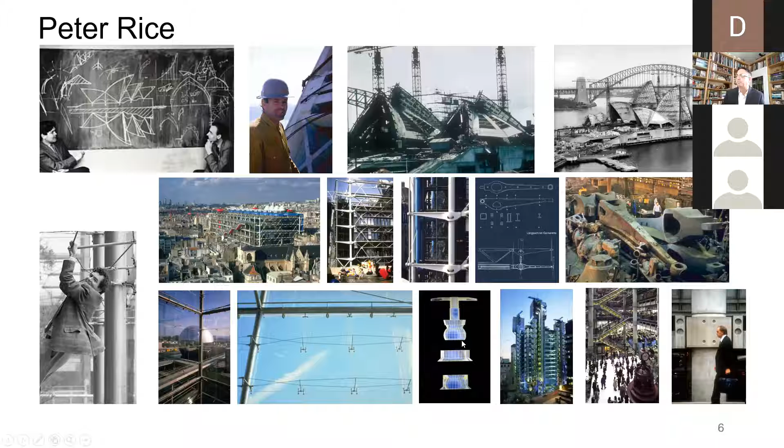These beautiful sketches are from MBM. Shame, do you know who did these sketches? Was this Oriol, or David, or was it Jose who did these sketches?

There's these beautiful stories of Peter Rice. Is that Shame? Yes. No, I would think it's Oriol's sketch. Yeah, I think it's Oriol Bohigas' sketches.

There's these beautiful stories of Peter traveling to Barcelona, working with the architects, and asking for pictures of Gothic cloister masonry construction in Seville, coming up with this idea based on ideas he had from the Palacio da Ajuda in Lisbon, where he'd seen this 17th century palace where the walls were constructed but weren't finished—the owner decided to go off to war instead of completing it, or had to. But this wall had withstood major earthquakes and was standing, so maybe we could build a building off of it.

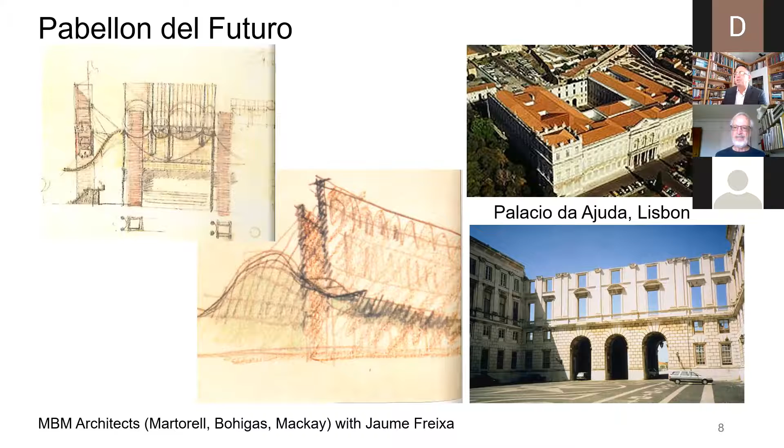Initially, the idea was to prop a roof with two stone walls. The conundrum was the project could only afford one stone wall. So I was quite fortunate as a young engineer that Peter Rice and Tristram Carfrae gave me a week to think about it and come up with ideas.

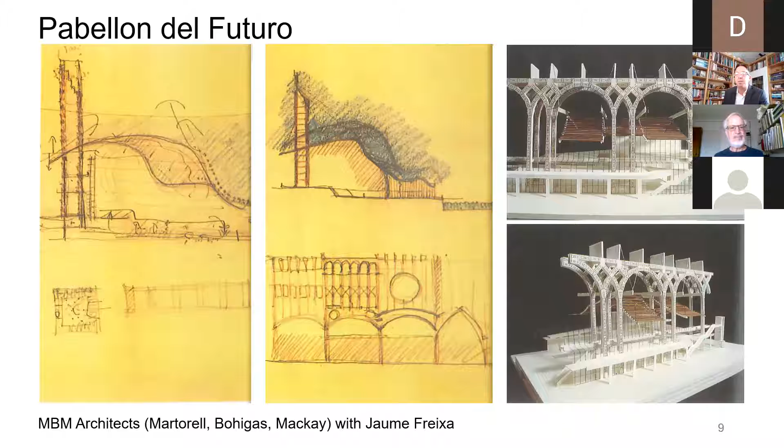The idea I came up with was to replace the second wall with a steel lattice that's braced in elevation, and in section it has these poke-through struts that tie diagonally. But you can think of the building—hey Rick, Battaglia, great to see you, Rick.

You can see in elevation that it's easy to explain. The complex three-dimensional system is such that if you push along the longitudinal elevation of the wall, you just get these diagonal ties working in tension, and if you push in and out in section, you get these diagonal ties. So it's essentially cross-braced three-dimensionally, but you can think of it two-dimensionally.

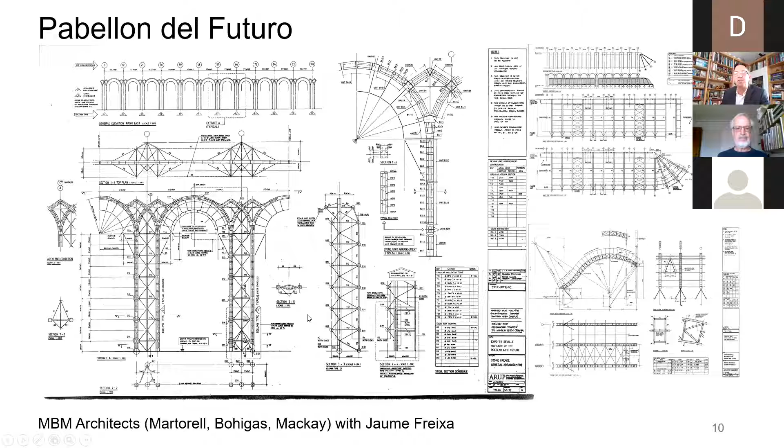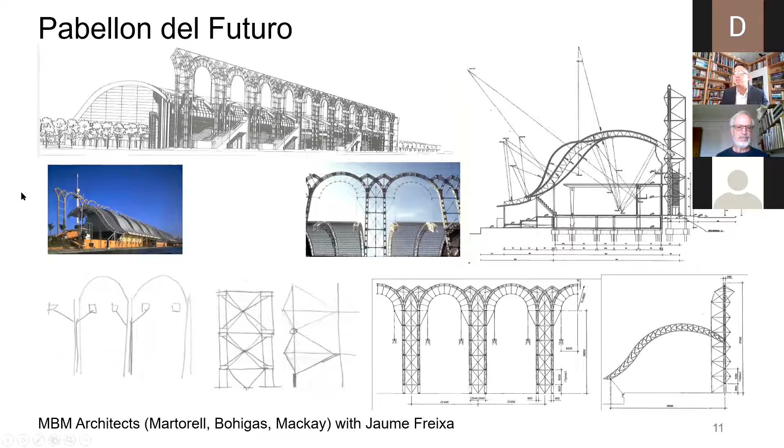Initially, the architect took our idea, and we weren't really clear what side we wanted the steel on, and they drew the section with the steel on the outside. The idea was that this wall was going to create a gateway to the city, because there's a park in the city of Seville, on the island. Just like the Feria has these beautiful gates, so we had to convince them, or ask them to please rotate it around, because we felt very strongly that the stone should be on the outside and the steel should be between the buildings. So the stone should face the park.

Here's some sketches and analysis that I did. Back then, we had to wait till everyone left the office, and we put a cardboard hood around the computer and shot a bunch of slide photos of the images on the computer at different shutter speeds and apertures, like 10 of each, and then one of them would be good. You can see the dust and stuff in the lens, but this is the basic diagram.

You pull down on a funicular pattern of ties to use steel for tension, and it compresses the stone. That's blue in the arch and red in the column. I'll try not to get too technical here. The columns are pin-ended stone elements because they're braced, so they're fully stable. They don't need to be moment connected. They can be pins between the joints, but the arches need to be continuous and transfer bending through the joints.

That's this idea of understanding stability of arches, creating analogies using lightweight geometric nonlinear structural analysis programs to allow joints to open and close. One key point I want to make is I tried to make just 5 load cases. I know it's 6, but really it's 5. I try to understand the structure with 5 load cases, and try to set that limit. In the end, you can add more load cases, but in modern day computation, you see engineers starting off and pressing buttons and ending up with 500 load cases, not really understanding the behavior and which one governed.

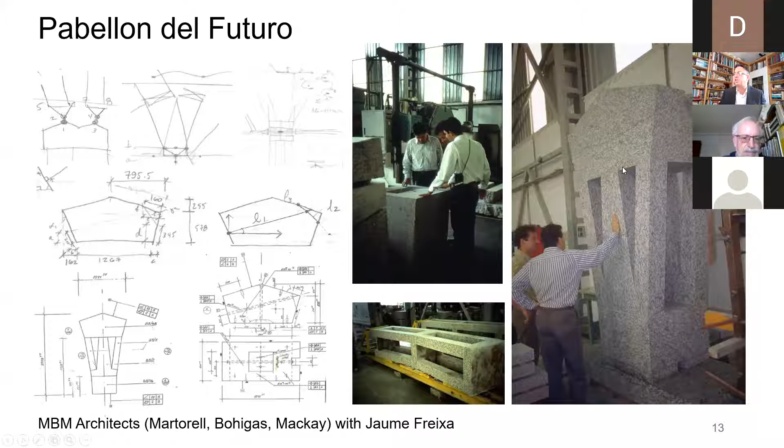Here's a picture of me and Peter and Ignacio, who was the stonemason, with some of the units in the shop. These are some of my sketches trying to figure out this springing unit. This is the area that gave us the most trouble analytically, and was quite a difficult piece to build. This is a different stone, but you get a sense of the scale of the structure. This is just the springing stone, right here. How do you analyze that? Let's see. I'm going to have to speed up a little bit.

One of the things that was really important to me was the base stone and how you encountered the building. I was studying classic architecture. People were laughing at me because I was trying to figure out how to do this base stone. They were making jokes about me, and I was trying to be an architect, trying to give it a pedestal or a capital and make it hollow so that people could relate to it. But in the end they said it needs to be solid because it's so dangerous that a truck or something could hit it, so it needs to be very robust at the base. So we'll just have a solid piece of stone. That's what we ended up using—this giant clamp, big chunk of stone, put it on its base, and off you go.

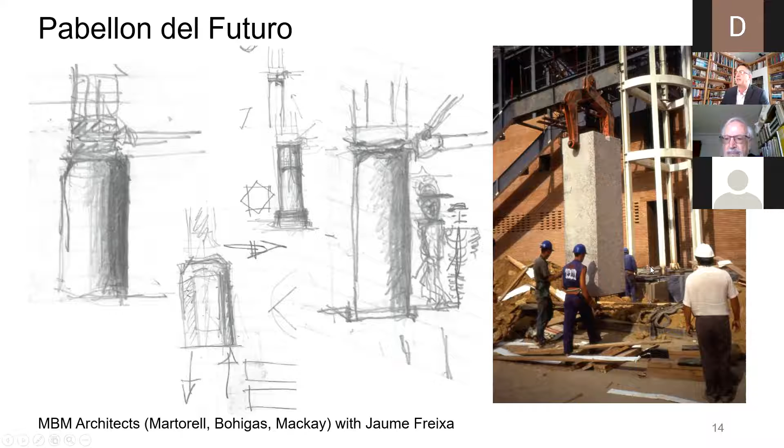Another story to tell was how we braced the arch. Initially we had this pattern, and we looked at so many different patterns of ties. Alistair Lenczner came up with this genius idea of making the last funicular radial tie a strut, called the out-of-balance strut, so that if the downward load from the roof is not in balance, the unbalanced load will make its way evenly with an even tension throughout the whole arch, loading the arch. Any unbalanced load will push on the strut and then pull and wrap itself around here instead of bending the arch. Sorry if I'm getting a little too technical there.

Hey, Pierre, good morning.

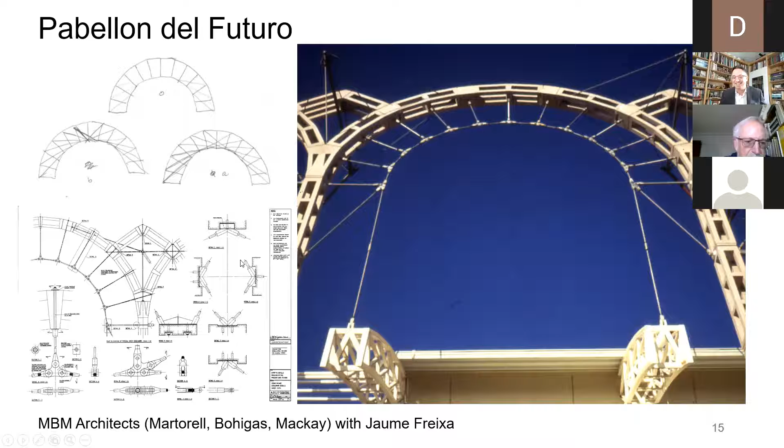Building it was the real challenge, and the builder insisted on building the capitals flat, which was the most susceptible point when you rotated it from its table and then tried to lift it, because it didn't benefit from its self-weight. Stone was likely to crack, and sure enough, we cracked the first units until we stiffened the jig and stopped clamping across joints.

I'll try to tell this quickly. Initially, the idea was they build the columns flat and tilt them up. I was so concerned about that, I offered another solution: just building stable units. And ultimately, that's what we did.

The contractor insisted on doing this big scaffolding on tracks. We told him it would be very hard to control the dimensions and would take too long. They built it anyway, and then ended up abandoning it because they couldn't get the tolerances right.

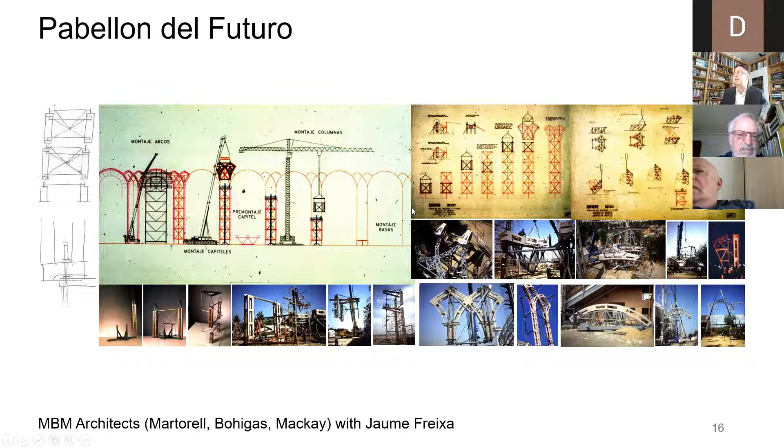So then we built these jigs. Alistair came up with another brilliant idea of a sliding joint and a temporary joint, so when you lifted it, we could control where all the displacement took place. These are some images of building it, and a couple of Peter's original sketches. The architects joked that he couldn't sketch, but these are pretty decent sketches for an engineer.

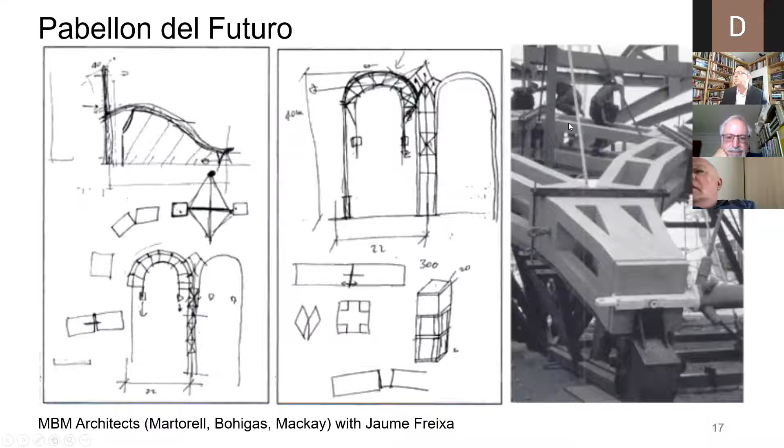Give them more credit. This is an example of building one of the capitals when it was rocking - that's me right there. I wouldn't let them tilt it further until I went through and checked every piece of stone to make sure it didn't crack. You can see we evolved to just clamp across the pieces, and try not to clamp across a joint, so when it rocks, all the displacement is controlled at the joints.

Another story here, about creativity and incubation: every other column has a stair interrupting the bracing, and to match the stiffness of the fully braced column with the portal frame that allowed the stair to pass through, we initially had castellated moment frames with lozenge, elongated circle castellations that you typically see in a castellated beam, or a beam with holes in the web.

I had this vivid dream out in the square in London, in Fitzroy Square, with the chairman at his desk in the center of the square. I went up to his desk, and he told me that the castellations should be diamonds. I got up the next morning, went into the office, and told Alistair and Peter that the castellations must be diamonds. I think they laughed at me and said, fine, draw it, diamonds it is.

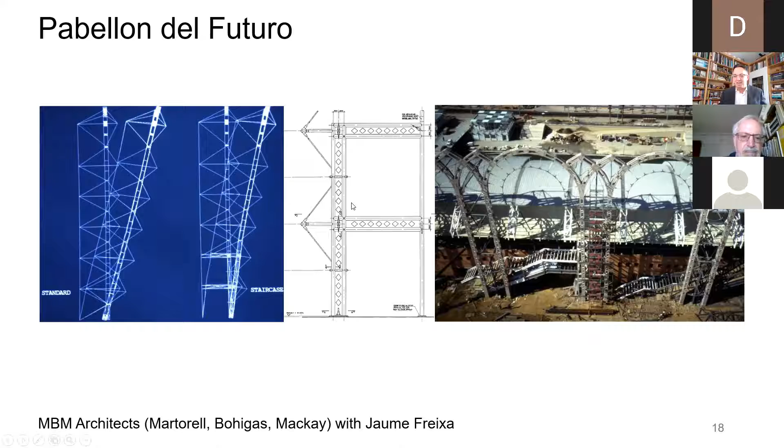The next project I want to talk about is the Sony Center in Berlin. This is a project I worked on while I was in New York with Murphy/Jahn Architects, based in Chicago, Helmut Jahn. This is really an amazing project - I just want to focus on the roof. It's 102 meters long by 86 meters wide, and it floats on top of these buildings.

The first story I want to tell here is about geometry. What we did is design one fabric strip - basically a surface of revolution with 10 degrees of fabric, 5 degrees of glass, 10 degrees of fabric form. Then we tried to figure out how to get the whole basis of the idea, which is a circle, an offset circle in an elliptical or ellipse-like plan for the plaza, and we tried to find that mathematically.

In the end, we just came up with the idea of extruding it like a cookie cutter. So we take one typical strip - the longest one was 60 meters - spin it about an axis of revolution, tilt it, and then extrude it and slice it. By trial and error, I just kept moving the slice back and forth until it kissed in the back, so you get this ring kissing - just kind of move it around until we get that kiss.

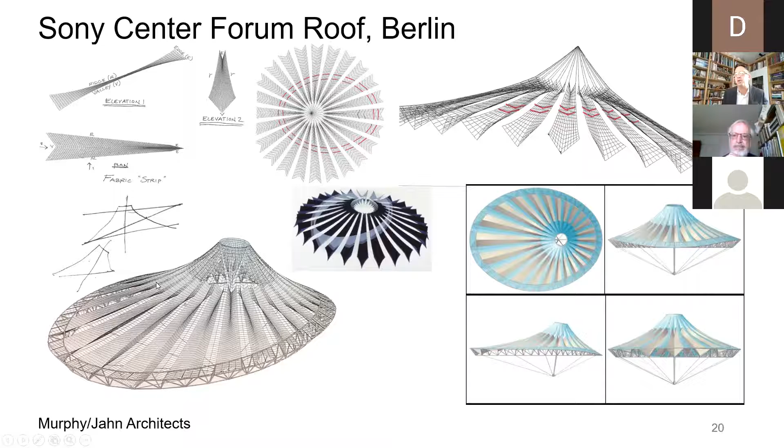So every one of these fabric pieces is the same, just cut a little bit short, and all the glass is the same as you go around. So it has this surface of revolution regularity, but through these geometric operations has a very dynamic form - you don't see this underlying regularity. The second story I want to tell is about the tension ring beam, during construction with the flying strut supporting a crane and scaffolding along the central tension ring.

So look, these are a lot of my original sketches, just looking at the ridge and valley as a cable truss with the fabric between the truss in this pleated form becoming the web of the truss, pulling up the ridges and pulling horizontally at the valleys. And initially all the valleys connected into the central strut.

That was the scheme, but in building up the engineering analysis, something like 2 in the morning, I noticed that in stages of building up the model, I didn't need to connect that lower valley cable to the central strut. I could just keep it as a tension ring. I think that's one of the really wonderful things about the project - the strut shoots through, picks up the ridges, but the valleys just go to a cable strut.

Another thing I felt really strongly about was the form of the central strut, and that the form should be about vertical force. We worked with the architects on whether the rings in the strut or the vertical elements should be the stronger design elements.

One of the things I tried to push for is getting more into the design of this node. I felt like this node was like the knuckle of the project - it's the key element, the focal point. I think unfortunately it just ended up with an engineering solution. I was trying to argue that they should sort of spiral around and be in different balances, that we should really get the balance right, but I don't think we really got there. I think it's a little bit of a shame.

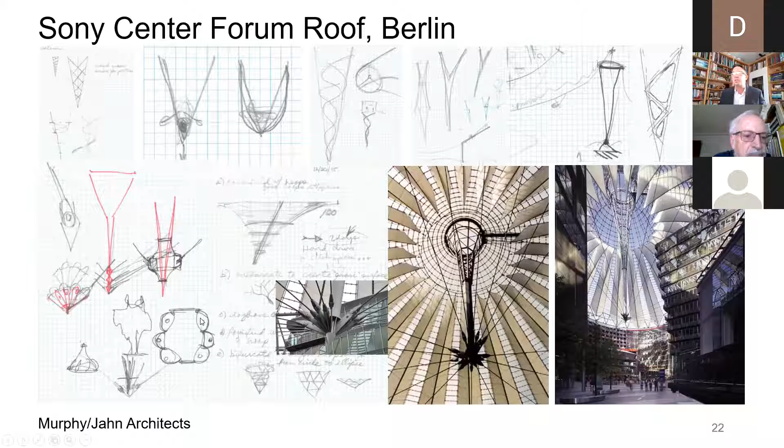Just some of the sketches and ideas of getting it up and running.

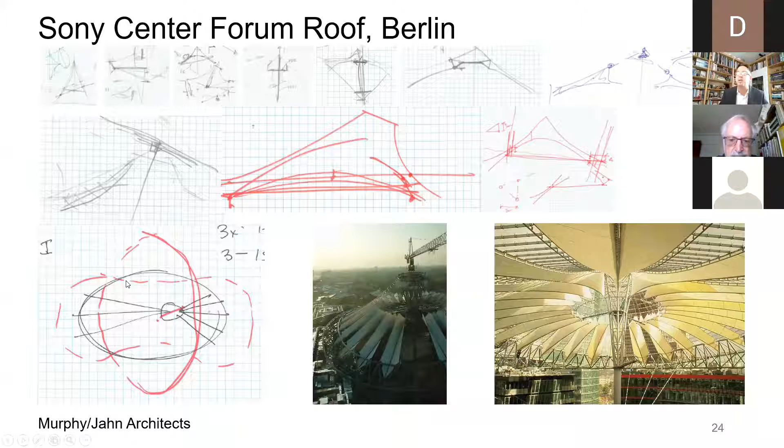The next story I want to talk about is the challenge we had when we put the whole model together. So we've got the tensile ring beam. We had these few points coming from the flying strut out to the ring beam, and what they were doing is dog-boning the ring beam, which is typical when a ring is in a circle and not funicularly loaded or equally radially loaded - they tend to pull it in and push it out like a dog bone and see a lot of bending moment. So the idea I came up with here was to...

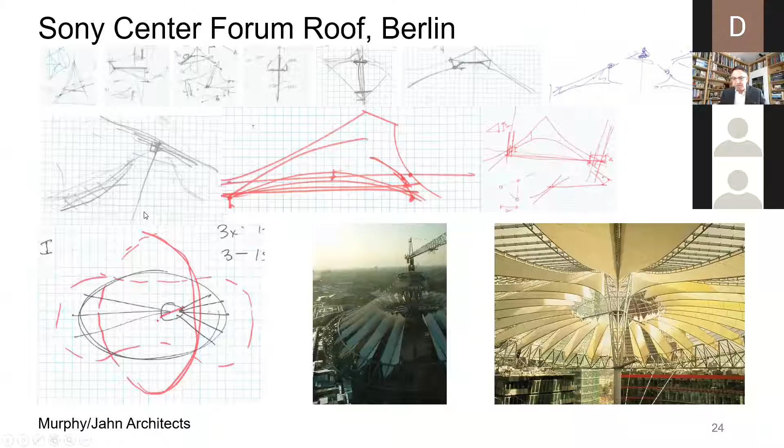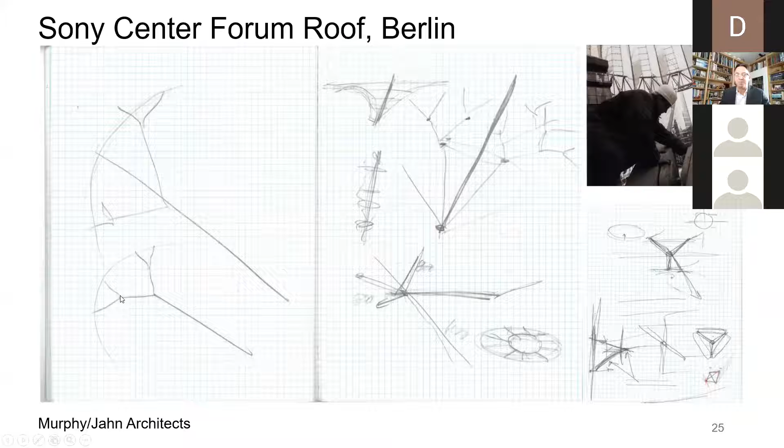Break it up into branches, so as the vector comes out, split it up into multiple points. It worked brilliant for the analysis, but as you can see, the scale of these fork ends and these ears, these pins - they're huge and really heavy. These were really difficult to build and get these points in space to be where they needed to be because they were so darn heavy.

Here you can see some images - you see this bottom point, you see the strut flying through the cable ring. You can see the trifurcation of this cable as it comes out, hits this node, and then splits out to spread that load to try to limit some of the dog-boning of the ring beam.

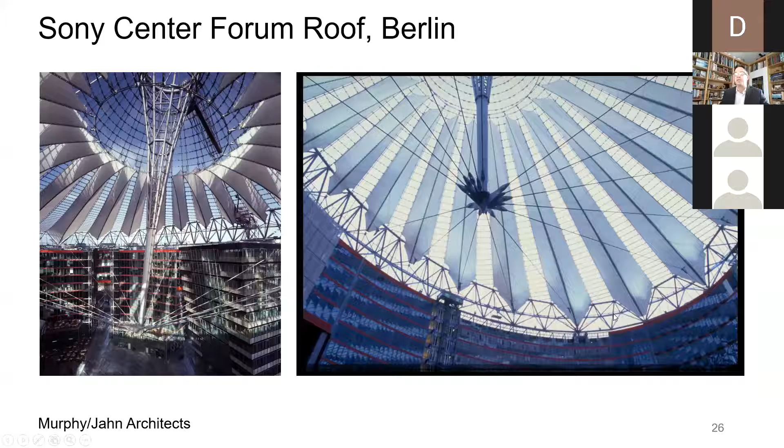The next project I want to talk about is the Taichung tropical rainforest greenhouse, Taiwan, with HOH and Bryon Irwin and Ian Tyndall.

I had a much more active role here in the design and form of the columns, and in my opinion it's super sculptural for a structural engineer. There's little bits that aren't really doing anything, but because I was authoring the project, I could put them in.

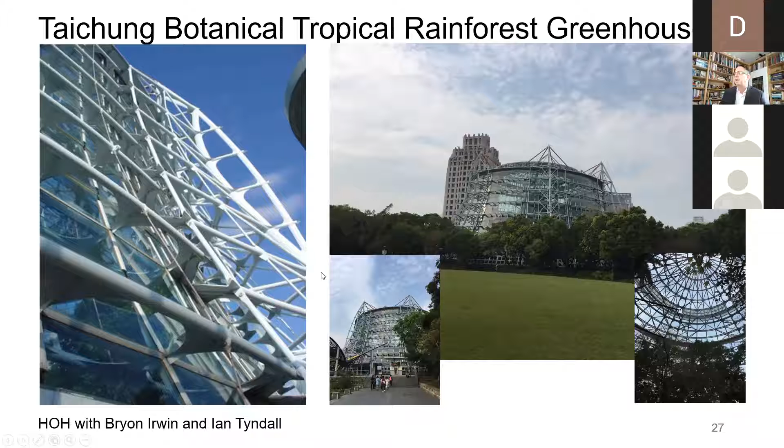Here's some recent images that a friend of mine took visiting the project. The idea is that this thing won't look so much like a spaceship or some sort of meteor that's hit the planet. As the trees grow, you more encounter this sort of fantastic sculptural form, and there's these amazing experiences inside the rainforest greenhouse as well.

Here's my computer model showing the 6 towers. It's a hyperboloid roof - half of the hyperboloid is suspended up to a conical collar with a spherical, like a skull cap dome, that sits on top on 6 portal frames aligned with the towers and some hangers.

These are some of my initial sketches, and I like to tell the story of how I came up with the form of the column. If you just look at the optimum form for a column, it's kind of a torpedo shape that's wider in the center to resist buckling. And if you look at the form to resist lateral load, it's sort of a bent A-frame. If you combine the two and rub your eyes a bit, maybe you get this sort of leaf-like sculptural form for a greenhouse for a tropical rainforest.

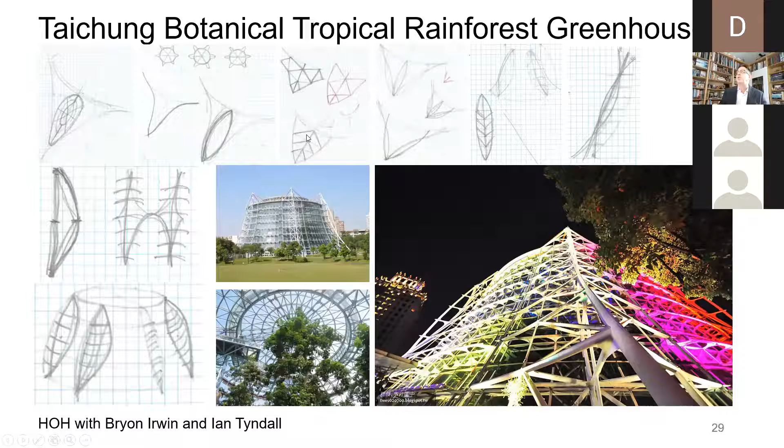And just some more sketches and images of how I arrived at these forms. They're not beautiful sketches, they're more about ideas. Just some images of how the glass is supported.

There's these clear bands. It's tiled, so there's no connectivity between the rings. The rings are slotted at these trident intersections. Again, there's a lot of poetic license with the form here. What I was trying to evoke was a Victorian aesthetic, kind of Jules Verne, 20,000 Leagues Under the Sea.

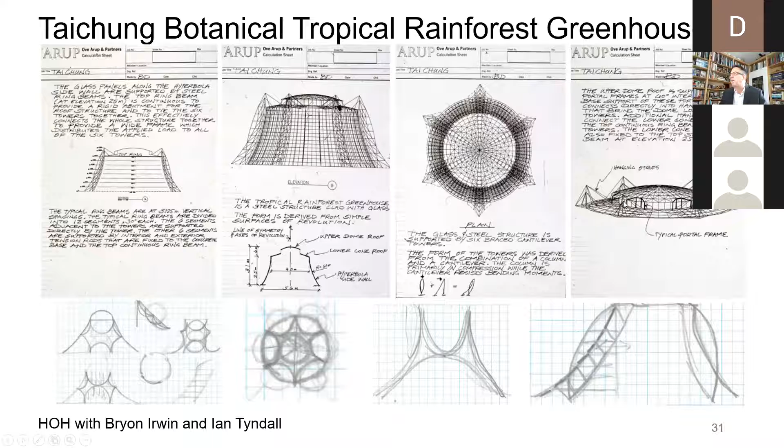And the idea is that you get these 6 towers supporting these rings, with the intermediate part of the ring suspended to the towers. Here's the portal frames - those are my dogs in the background - supporting the central dome.

I wanted to use lenticular column forms because of the radial orientations of the 6 towers. I didn't want to use pipes. I barely held on to this when it went out to bid and the prices were coming out very high. But a Chinese steel company based in Kaohsiung, Taiwan stepped up and said they could do it. So we got the lenticular forms.

And then you can see where this is in the shop, putting it together. I wanted them to curve it as well, and I was convinced that it could be segmented and still appear curved - because imagine bending this, welding it, and then trying to curve it again. Basically impossible, right? But then here's the casting.

I want to tell a story about this, there's a lot of castings here. This is a 350 millimeter deep lenticular section and a 500 millimeter deep lenticular section, joining together at an intersection. And I asked them to smooth this out and make it somewhat hyperbolic between the castings.

And they said, sure, we understand you - how can we do that? So what I asked them to do, after I approved the shop drawings technically for the metallurgy and the sections, is they made some small models out of railroad board, and then they added modeling clay, and sent me pictures of those models.

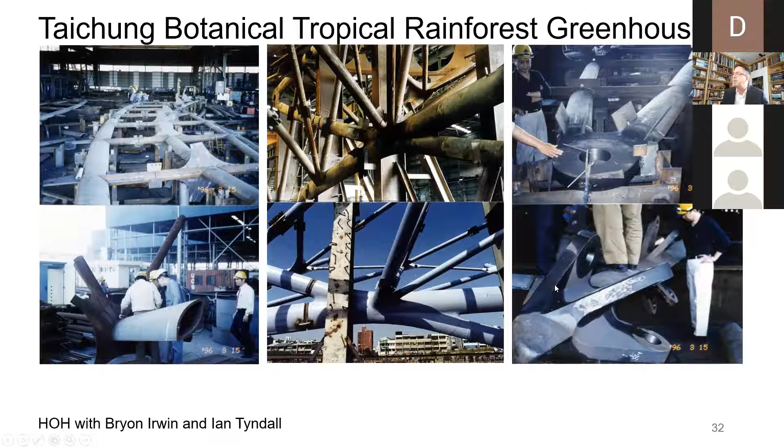I was based in New York at the time, and I said, these are great, just add a little bit more clay please. And good to go - you can see here some of the molding of these forms.

The last story I want to tell, hopefully the last, is I asked them to paint it 3 different colors. And the contractor screamed foul - no way. I think he said, no way in hell am I going to paint this 3 different colors.

And so I wrote a paper, because the client asked me to justify 3 different colors. So I wrote a paper on it and sent it to him. And the client said, yes, please paint it 3 colors.

And what I wanted was this oxblood red - they chose something a little bit too cherry red - but I wanted oxblood red to describe the load path. So that's the tension ties and the arms and all the castings that form the splices and the 3-dimensional elements that provide additional support along the 6 arms.

Dark blue for all of the pipes and light blue for all of the plate. And then where there's pin connections, pin castings, I sketched for them the transition between the dark blue and the light blue - there's kind of these paraboloid transitions.

I really like this image where you can see it's spring-loaded at the base in these kind of tree forms. You can see the castings of the way the arms come about, and there's sort of these half-ellipsoid forms cast in steel, and the way these castings at the base come together in these pin connections.

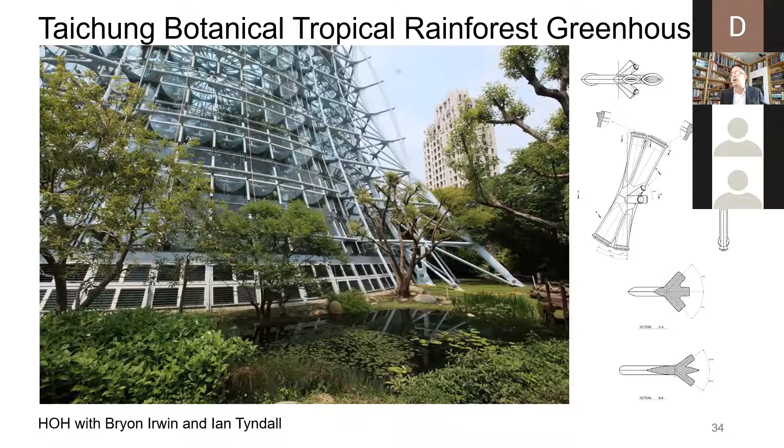So maybe, pardon the comparison, we can all think of other designers that maybe get a little carried away with their projects, and architecturally we poo-poo it and say we don't like it. But maybe people really do want some stuff that's a little bit more creative, sculptural, imaginative, and has a signature, at the risk of not being so architecturally true.

And maybe that's true for other buildings. Some of the engineers on the line can relate to where things that are suspended, if they're kind of heavy, they add to that sense of suspension.

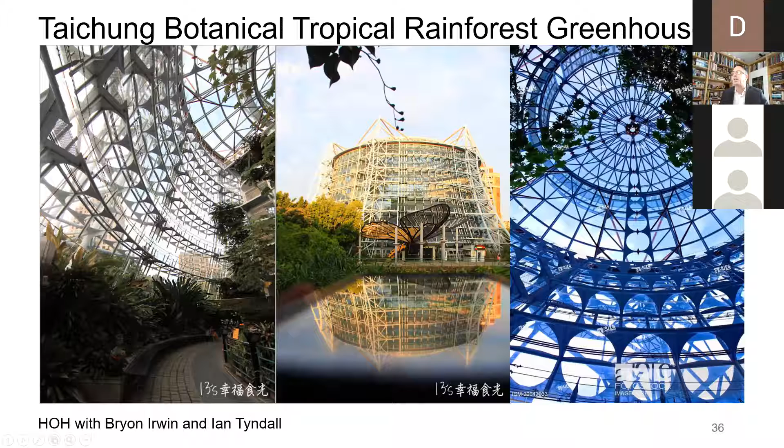So I want to wrap up the talk. I don't want to just end on my third project. I want to talk a little bit about some thoughts I have, design thinking, how we model things. I think engineers tend to model a little bit too much now on the computer, too soon.

I just wanted to share these quotes. All models are wrong, but some are useful. All models are wrong, and increasingly you can succeed without them. And this kind of thing of garbage in, garbage out is not just about the calculations, it's also about the design.

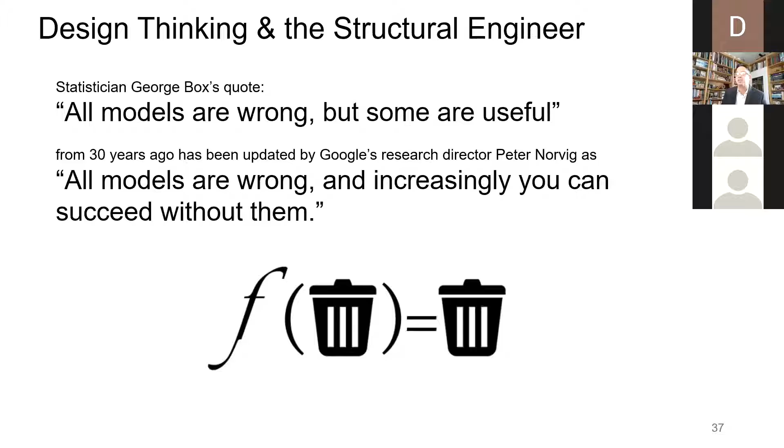And if you let the computer take over, it might be interesting and fantastic, but that doesn't really mean it's great. In other words, it can be smart without being wise.

I'll talk a little bit about the evolving role of the structural engineer, and the discussion of the recent shift of 20, 30 years ago, where engineers were going from being calculators to communicators, and this kind of shifting role of interpreting, understanding, and communicating.

And with artificial intelligence, machine learning, are we getting pushed out of our role of interpreting and understanding and communicating? And if so, what are we doing and what are we going to do?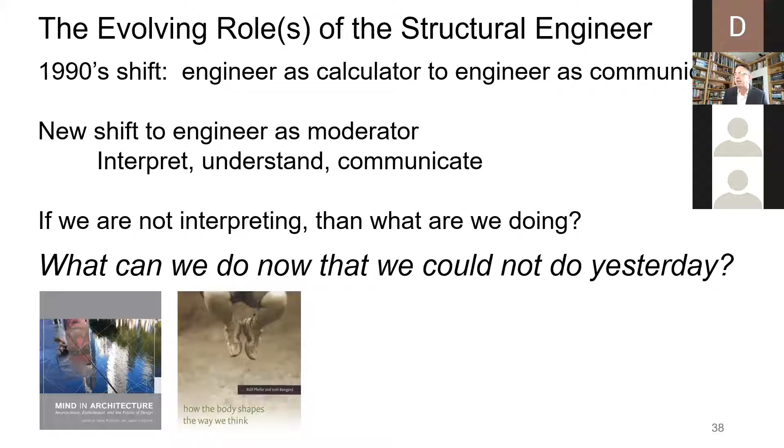And I want to suggest, at least from my point of view, that this embodied mind is very important for the architectural or artistic side of structural engineering and structural design.

Sorry about the long quote here, but I wanted to share with you these current thoughts I have. I've been really interested in this hedgehog and or fox idea, which comes up a lot in macroeconomics, philosophy, and global leadership and politics. And we can all think of a few hedgehogs now, that sort of one big idea.

And I think the analogy is: hedgehogs, when being attacked, roll into a defensive ball, whereas foxes rely on their cunning and assess the situation to do something unique for any given situation and respond to that. I just wanted to share this quote on grand strategy.

And I think you can all read this, but I think for engineers, it's not just the engineering — I was asked if it's going to be a very technical talk, and it really wasn't. But it includes not just theory, observation, and rigorous calculation, but also narrative, analogy, paradox, irony, intuition, imagination, and not least in importance, style. And I think when I go back to Peter Rice, there's a lot of this imagination and his particular style that goes into his work.

And I think you can say the same of Calatrava and Candela, Torroja, and some of the great engineers that are practicing now, like Schlaich and quite a few others, Geiger, and others that are on the call.

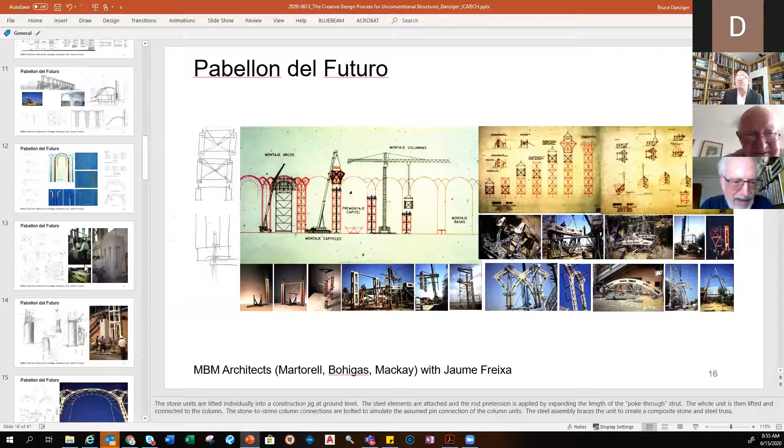And Johnny, do you want to say anything? Yes, first of all, I just realized that I had been in Berlin, and I admire the Sony cupola. I had been in Taichung, but at the time, I'm afraid your building was under construction, so I missed seeing your three works, the three major works you presented.

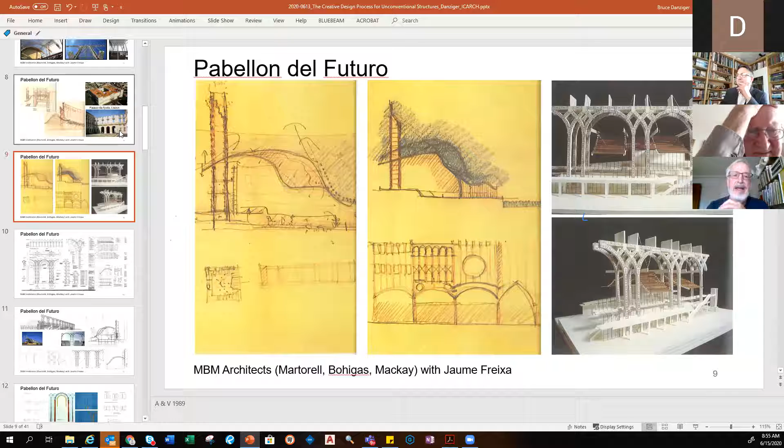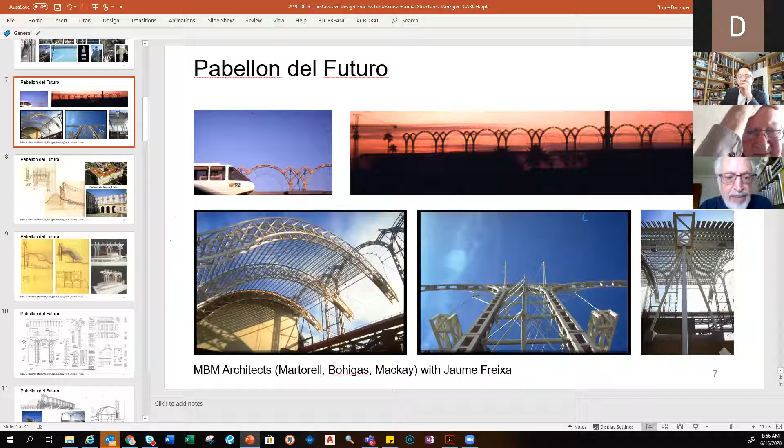Respect. The Seville building, as I look at it, I realize that in some ways the architectural design of the space, of the building itself - that is to say, what's behind the roof - the roof and the structure hold themselves together in a spectacular way. But I'm not so sure the architects, including myself, responded to the lacy and crenulated and very rich texture of the arcade properly.

My first reaction now would be that our building would have had to be a lot more discreet. Those staircases, for example, were clearly intrusive. I mean, in retrospect, when architects always do that, don't mind me too much, but the fact is there were elements that would interfere with the visual perception of a very airy and lacy type of texture for that screen-like facade that we design altogether, which is brilliant.

Anyway, so much for that. I don't want to take more time. Thank you, Bruce. Thank you very much for the reminiscence.

Yeah, and we moved pretty quick, right? So we were design and build, and from initial design to final build was maybe 2.5 years. Yeah, 2.5 years. Yes, yes.

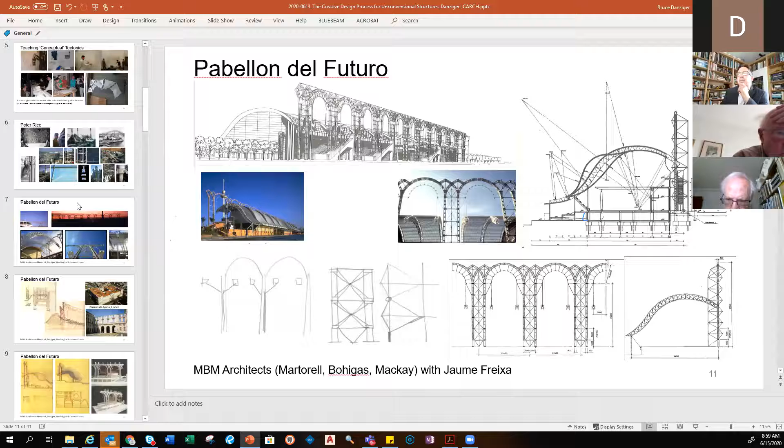I wanted to give Pierre Alexandre a chance to add something to what I was saying about Peter and his unique genius. Something that might be good is, how old were you when you worked with Peter?

It was 1988, so I was 24. Something very special is the way Peter worked with young engineers, and the way he always wanted to be discovering things and not necessarily repeat what one should be doing. We were very young at the time, and I think it's part of what Peter was looking to achieve, to have a flexible engineer, open-minded and discovering all the time. I think this is one of the challenges that engineers and designers in general have throughout time: how can you stay young getting older. I think this is one of the biggest challenges we face, because we always evaluate risk, and we tend to fall back on what we have done before. So if you look at most of the people Peter worked with, they were pretty young, I think.

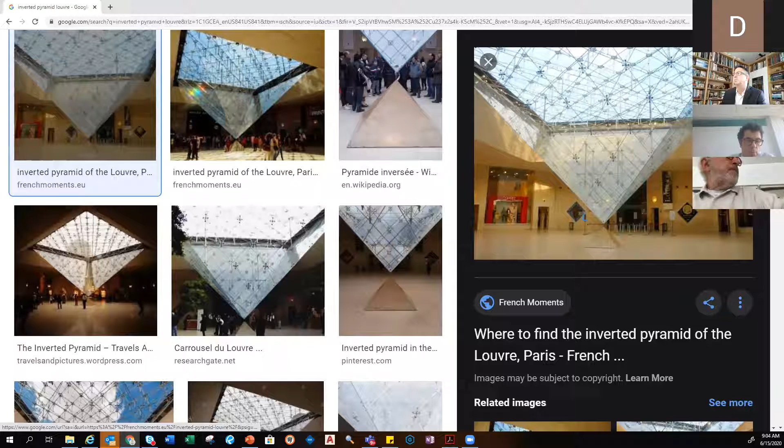But I see there were some more hands. Dan, can we go a few more minutes? Of course, yes, sure. It was a pleasure, your presentation, and I feel honored. Thank you.

So anyone else that would like to contribute to the discussion about what are we going to do going forward to influence the next generation of creative thinkers?

Bruce? I would like to say something. Maybe Le Corbusier had a strange statement. He said, 'I love engineers and I love painters, but I don't love architects.' What do you make of this? Why do you think Le Corbusier loved engineers and painters, but not so much architects? In fact, he met, so to speak, Frank Lloyd Wright, who said, 'Nothing wrong with architecture except the architects.'

Yeah, I'm not sure. There was another. Let me try to think about that one.

I think we all come in different shapes and sizes, and maybe Corbu wasn't the greatest guy. I don't know, I didn't work with him, but maybe he felt like he was the one and only architect.

I saw there were some other contributors, other people. Bruce? Yes, can you hear me? Yes, is that David? No, it's Jeff Goldberg. Oh hey Jeff, how are you?

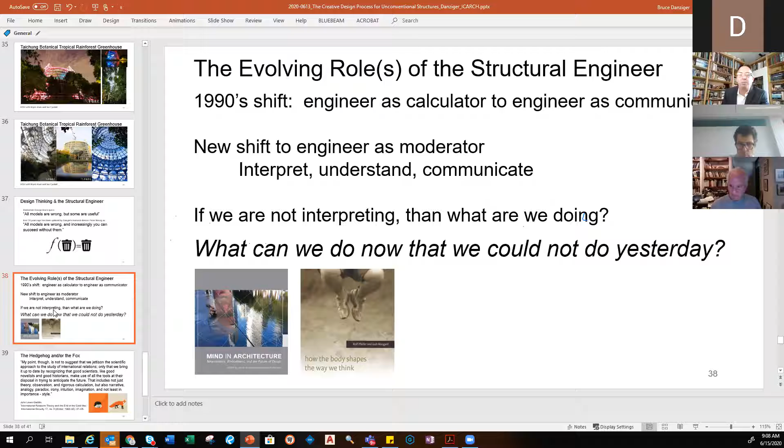Just a thought. Yeah, I think ultimately it's what we want to explore, how to bring up the next generation to collaborate. I want to really focus on structural engineering and creativity. It's impossible to do without that architect-engineer relationship, but I would make the statement that maybe engineers are hedgehogs and architects are foxes.

And I don't want to bookend it, so I want to keep it loose. I think Peter Rice was a fox. I think I'm more of a fox than a hedgehog. And I think engineering hedgehogs don't create space for the foxes in their organizations in the process. So is the issue then how does an engineering fox survive in the hedgehog environment? And how do we raise more foxes and less hedgehogs? Excellent.

Craig, were you gonna? I saw your video. Yes, I just wanted to throw out a response to a book that I've really enjoyed about the relationship between architects and engineers. It goes through very old history on this, through discussing some modern structures. That's the book Architect and Engineer by Andrew Saint, published by Yale a few years back. I found it a very illuminating read. I just want to put that out. Again, Architect and Engineer, Andrew Saint, S-A-I-N-T is the author. That's all, just wanted to mention that.

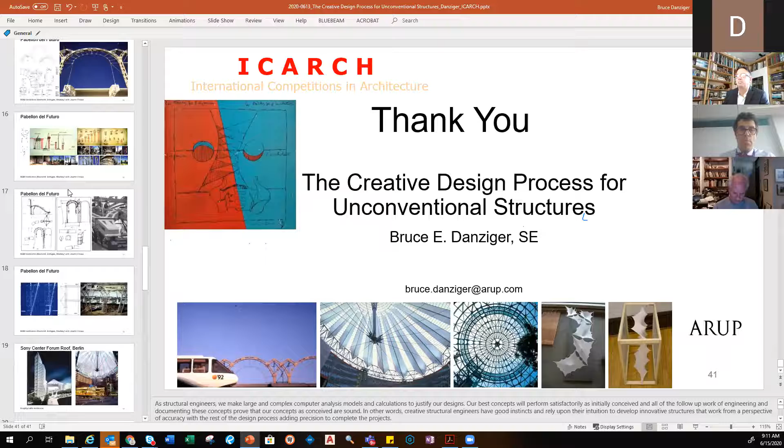I think that oneness epitomized by him and by the builders of the great cathedrals until the Renaissance perhaps should be renewed, because this separation between the architect and the engineer is probably sometimes simplistic, and it doesn't tell the truth about the warmth that the engineer brings to the work they accomplish together. So I think the modern separation between engineer and architect could be questioned, reflecting more on the situation before the Renaissance. My take is that when structures are unconventional, the architect and engineer collaboration is a master builder collaboration, hopefully with the builder as well. It's AEC: architect, engineer, constructor, contractor.

I wanted to share something I heard: when Candela showed up in Mexico, there were no shell structures, and after Candela left Mexico, there were no new shell structures being built. So there's a bit of personality, maybe celebrity or charisma, that makes these things happen, that certain people have - Torroja, Candela, Calatrava, Peter Rice, Buckminster Fuller. There's a long list - Kawaguchi, and so on. Just to add one more thought: my presentation and ideas are very Western focused. It's a language barrier, so it's not only the hedgehog and the fox, there's also the West and the East that could be better aligned.

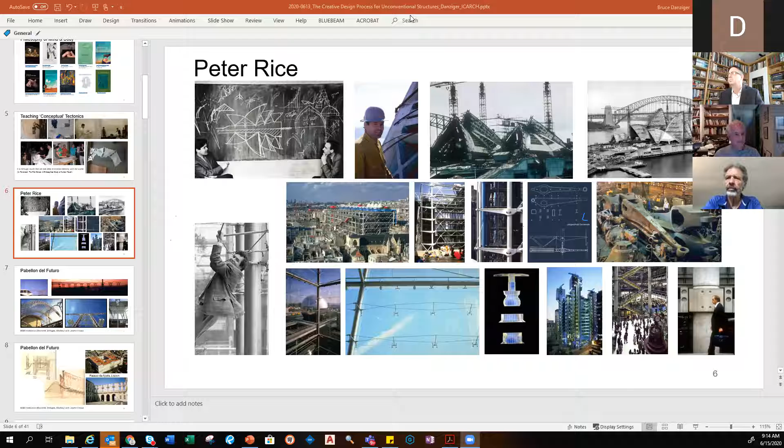Hi Bruce, Kais here. Great presentation, thank you. One thought I wanted to throw in there: I think we're seeing more recently in engineering offices, architects actually working in engineering, and I'm one of those. I'm in a company that's 85 years old, and I was probably one of the first architects to be part of that. I think we're seeing much more of that, and it's interesting - architects can interact with the client and understand what they want to achieve, but also know how engineering offices work. I'd be interested in your thoughts on that trend, which has probably only been happening for maybe 10, 15, or 20 years. I'm sorry Kais, can you just summarize the question? Yeah, architects working in engineering offices.

I think if they're not, it's a bit of a shame, because you want all these physical models and you want making to happen in your process, and architects get that and do that. Engineers - if you go into an engineering office, you tend not to see a lot of that, and I would like to see a lot more. Architects in engineering offices, from my experience, tend to be more related to building enclosure and facades, and they tend to spend a lot of time doing visualizations and 3D modeling. I don't know if that was a good response.

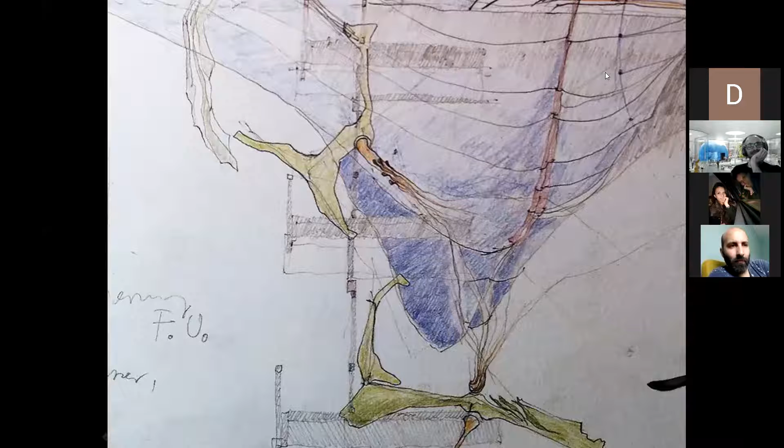So some drawings of Günther Domenig. And by the way, I don't want to forget, tomorrow I will give a talk on Charles Correa, the great Indian architect. It will be his birthday, and I think it's important to study, to witness the work of other people besides Europe or the United States, or Far Eastern countries like Japan.

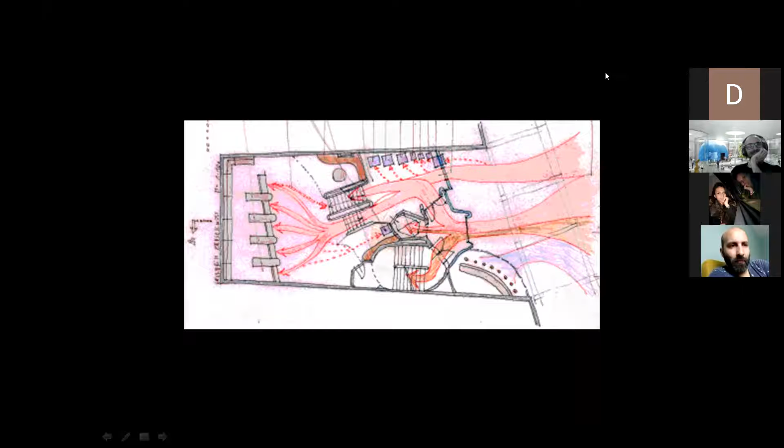There is greatness in many parts of the world, including in a humble, modest, anonymous village in Africa, like in Mali, the Dogon culture, which is beautiful.

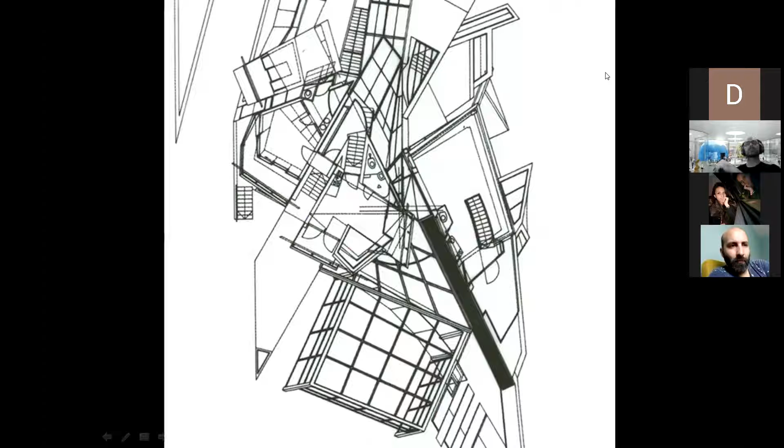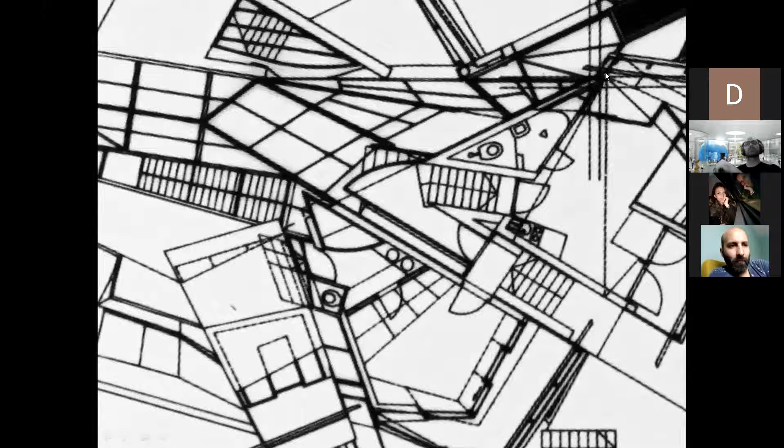Anyway, this is his own house. He labored for many years at this house. If you can imagine, it is an explosion, an implosion. It is a crystallization, because it was built of a tormented inner life, I would say.

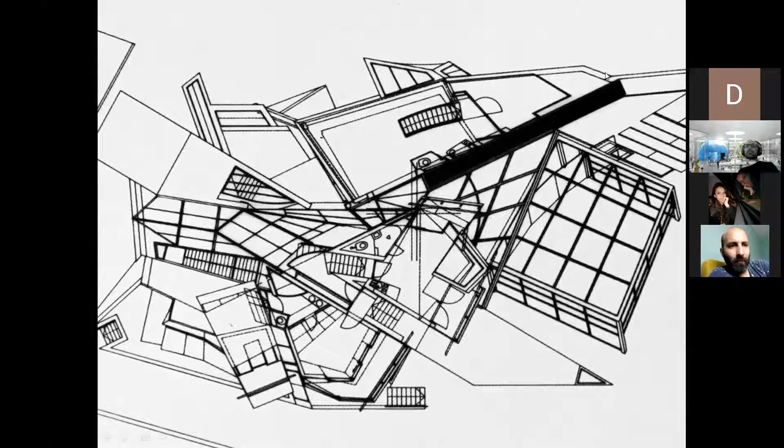I could easily place his work, and in fact I did, in a series of presentations under the title Architecture and Conflict, because there is conflict here, obviously, as there is conflict in many deconstructivist works. But this was so-called deconstructivism before deconstructivism, and in a way is a little more than just deconstruction. There is conflict, and this is conflict within himself that I actually identify with to an extent.

I'm surprised that the building is still up, because the last time I saw it, 2 years ago, people were demolishing the interior, which is very, very valuable for architecture. I hope they didn't ruin it. They were transforming it from a luggage store into a hotel, a kind of a mini hotel. But even the luggage store was a disgrace, considering the architectural complexity of the building.

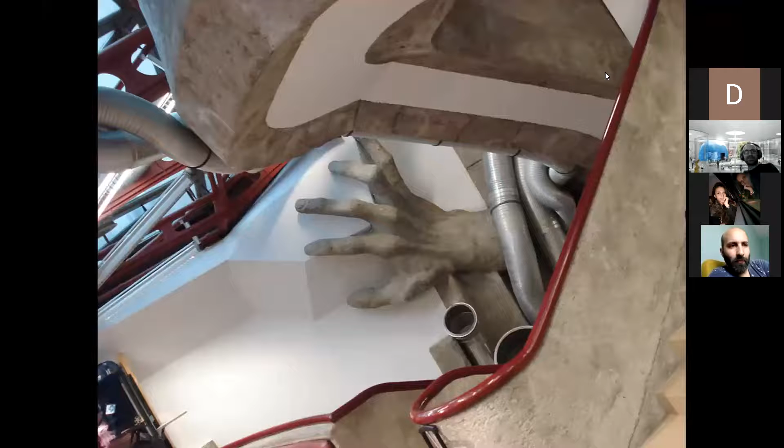This was done by Günther Domenig. You'll see other works by him, but I think this one is the most outrageous. I wonder what he thought, what he felt when he did this building. And I wonder even more, what did the bankers think?

I'm not a great admirer of banks and bankers, but in this case, I do admire them, because I think they show some openness of mind, maybe more than just some. And in a way, they are equally the creators. They contributed to this building being done.

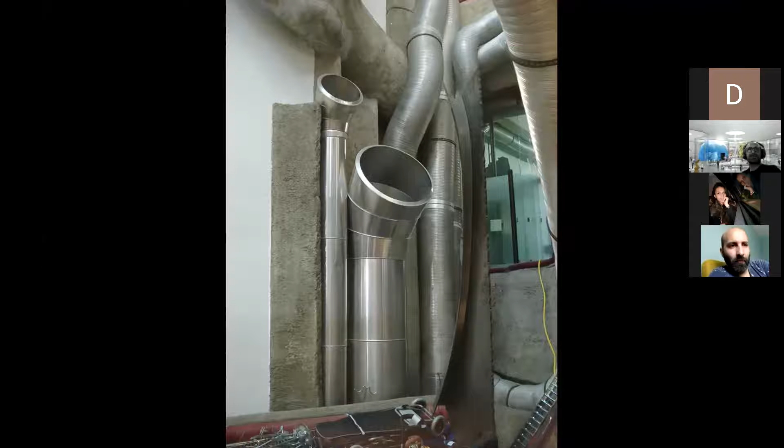There are all kinds of details here. There are, maybe the word is not appropriate, some almost Gothic architectural elements here, which are mysterious and almost unexplainable in the second half of the 20th century. And this meeting between the heaviness of the stone, the concrete, and the technological intestines, or how to call them, these wires, this cable, these pipes.

You would have said, well, this picture was taken in a Gothic cathedral or in some kind of Gothic building. No, it's in the luggage store in Vienna. He didn't build it as a luggage store, but that's what it became. And now it's a hotel.

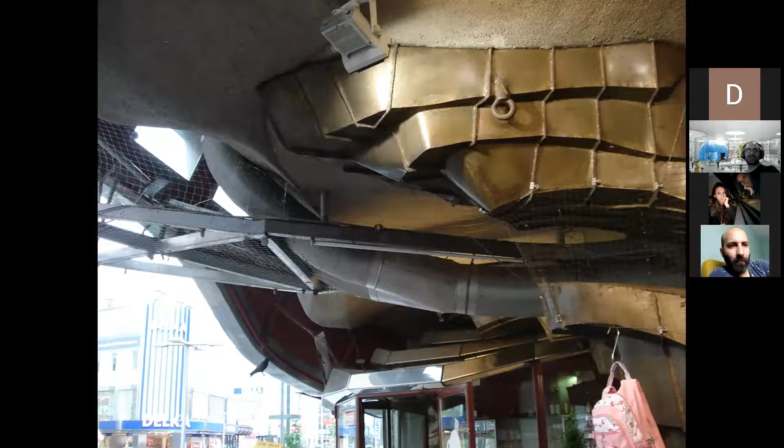This is the interesting part, I mean the canopy above the entrance. You can still see the annoying backpack hanging from there. But look at the richness and the complexity of the canopy. I only regret I don't have enough pictures.

And then also the floor, the pavement at the entrance of the building itself is kind of tormented and tormenting. It is an artistic creation. It is a design that is not based on a Cartesian system.

I love this picture, I do. If anyone would have told me this is a bank, I would have said, come on, please, give me a break, it cannot be a bank. But it was a bank. It was designed to be a bank.

I truly have the highest admiration for such a client or beneficiary who pays for something like this. I'll easily take my hat off, if I had one on my head. I don't.

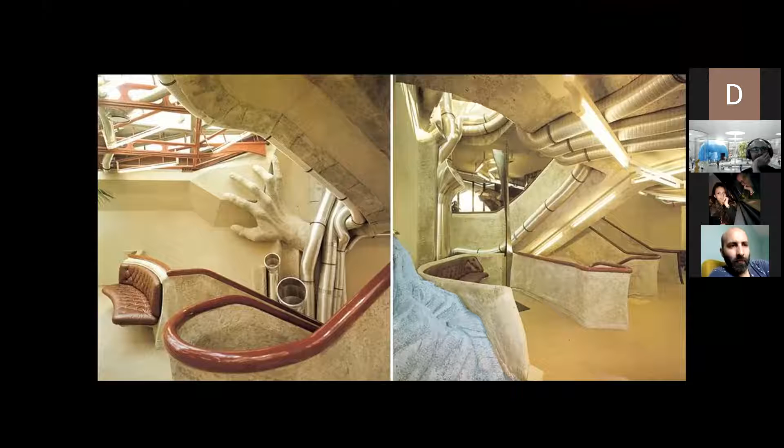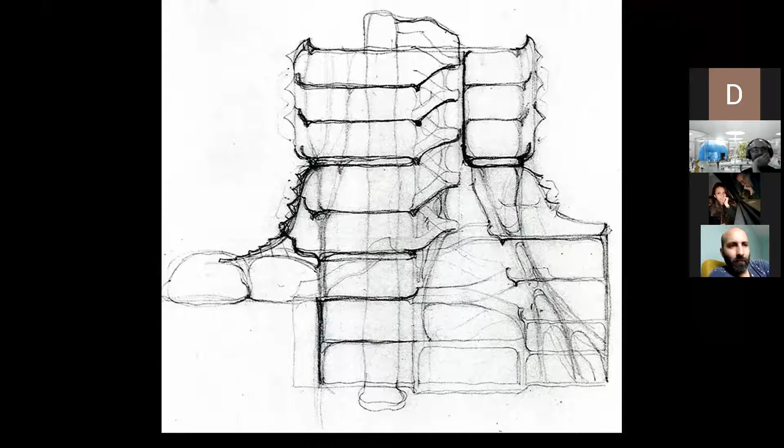Anyway, some drawings of details, so lyrical, you wouldn't really expect someone who drew in this way, very delicate drawings, to build in that way. This is a sketch section through the building. He designed everything.

So I actually think Günther Domenig had a medieval spirit. And that's why I mentioned in relation with Bruce's presentation that maybe we should go back to that kind of architect that Brunelleschi epitomized, the so-called last carpenter.

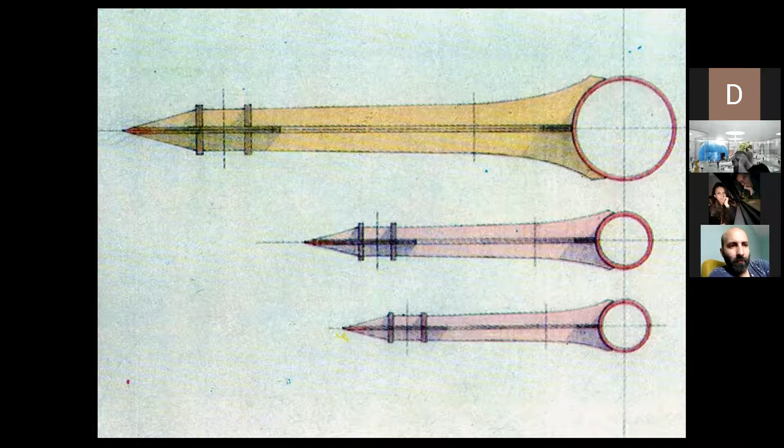I have the highest admiration for Alberti, the so-called first architect, but there are also other paradigms possible. One is this one by Brunelleschi, where the architect is also a master builder, very interested in the construction. He's halfway between the engineer and the architect, or better said, he's both. He's the master builder. Here you have an artist, but he drew even the smallest details, the constructive elements.

When I last visited it a year or two ago, there was a man there who heard us talking with the students and invited us in because he knew the language we were speaking. He told us this architect, Günther Domenig, makes us totally crazy because we have to handle very carefully what he built here, but it's so unusual. He actually said this man probably smoked something, meaning drugs, when he did the design.

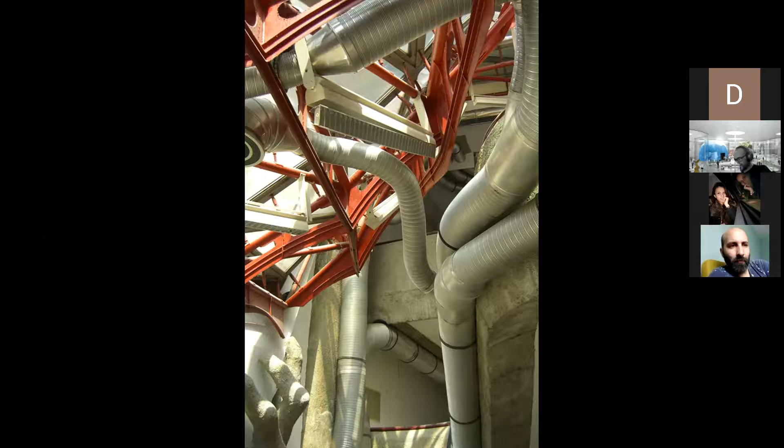And I wonder why shouldn't we bring back sculpture into architecture, even in this so-called iconoclastic way? It would enrich our buildings, I think. Even here you can see the craftsman. The facade is metallic, you would say cold, but you cannot avoid thinking about the craftsmanship, the detail. Everything is designed and it has a certain character.

There he is, that's Günther Domenig. The problem with such dramatic interiors, a problem encountered in many deconstructivist works, is that no matter how dramatic the interior, how deconstructed, the so-called bourgeois way of life is betrayed by the stair, because the stair is still kind of common. Yes, you play a little with the parapets and the staircase, but the stair itself, you still have to respect it—or do you? Maybe the stairs are too quiet, too repetitive and too predictable. Maybe we could imagine some uncomfortable stairs that would make Neufert get totally crazy wherever he is now.

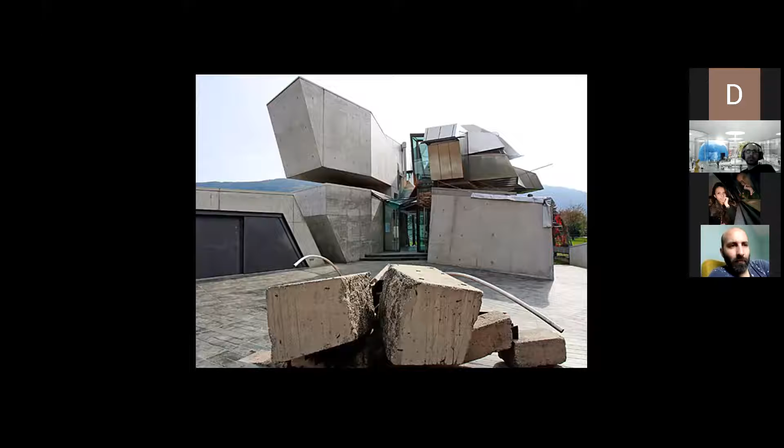I don't know, anyway, it's a big house, and now it's a foundation there, or a museum, so it became a public building. In this case he was also the client, he was the inhabitant. When I presented this work a year or two ago, somebody told me—if I recall well—that a relative of Domenig actually got hurt, fell somewhere in the house, or maybe even lost his life, I don't recall well. But the house, yes, could be dangerous.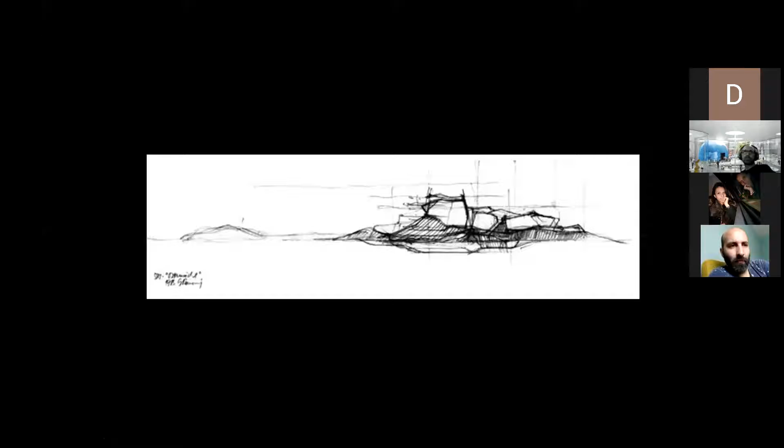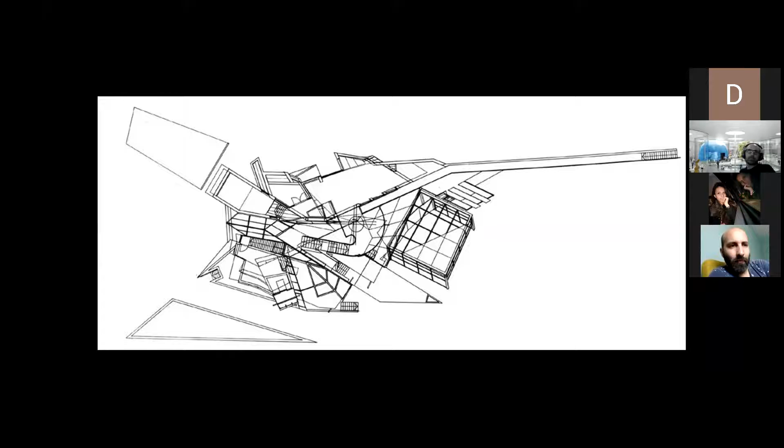Here we have an initial sketch, then the plan, if we could call it so—but we could call it so. It's interesting that a plan usually refers to a bidimensional drawing, but here you're not sure, is it bidimensional? Not really—it's something between a plan, a perspective, an axonometric drawing, and its quality is that it erases the barriers between bidimensionality and three-dimensionality, and maybe we can add one more dimension, if not several.

Again, I admire the interior, but again, when I see the staircase, the stairs could have been in a quieter building, just as they are. So there seems to be a contradiction here between two systems of thinking and two systems of doing architecture. And I wonder why we cannot sabotage the predictability of the stair either, yes, with all the risks involved that they might become very uncomfortable. But once you assume a way of doing architecture based on Friedrich Nietzsche's appeal to us—live dangerously—then why keep the stairs so predictably, so-called comfortable?

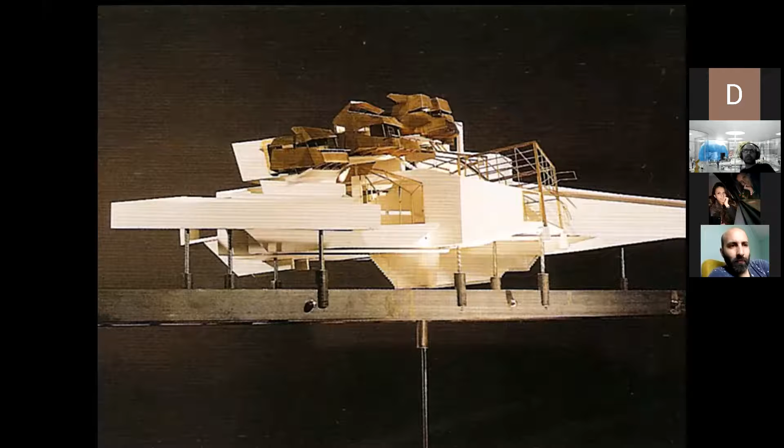This is a model, one of the models he built for the house.

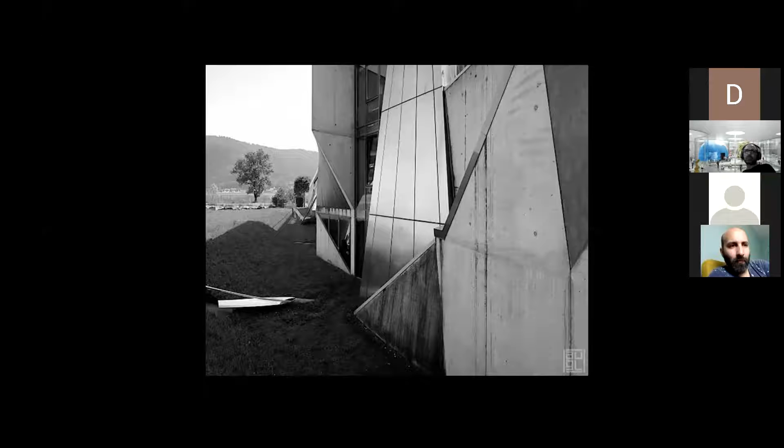Bruce talked about the engineer getting wild. Here we have the architect getting wild in the sense that he was also the client, so he had complete freedom to do whatever he wanted. Sometimes this complete freedom maybe is not so good, because moving beyond a certain limit, the edge of wildness could be problematic.

But it makes me smile. Look at this house and look at this one. They are not too far away from each other. It just crossed my mind that maybe this one was his too. Probably not, but I don't know. Seems to be part of the same property almost. Can you imagine a man doing this and also being the owner of this building?

This makes me think of Sir Norman Foster, who builds the way he builds, very technologically, but he purchased a very large building in the United States, in Martha's Vineyard, where the Obamas used to rent some space, which is almost the opposite of the architecture he does. So maybe Günther Domenig, I don't know. I like to think that I'm totally wrong, but it is amusing to see this house and then this one not far away from it.

There are interesting things happening here. It's not just the building, but the outdoors as well.

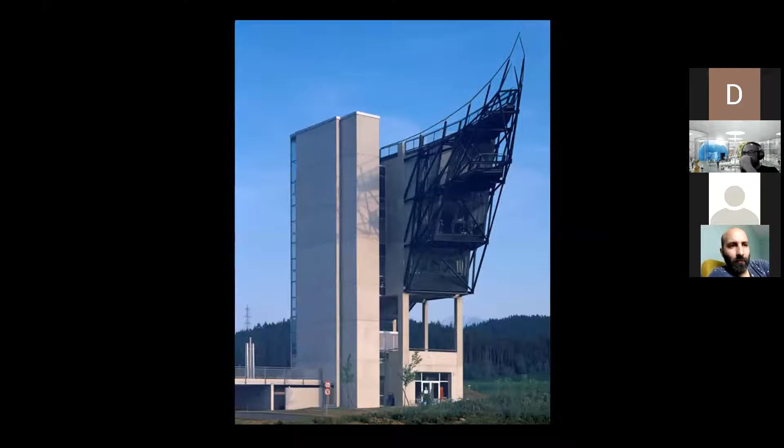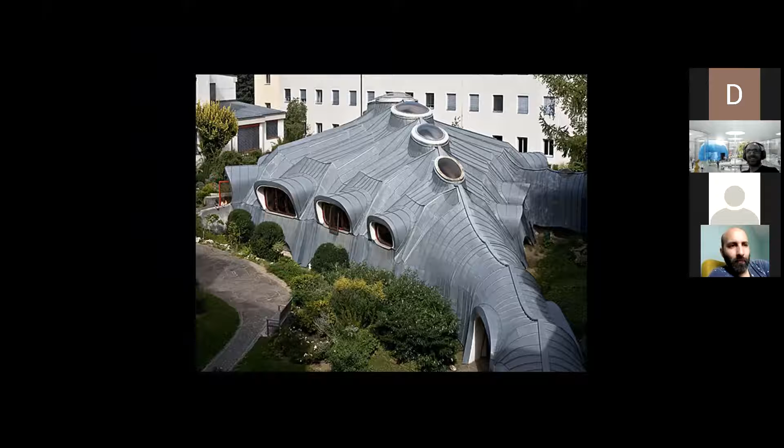Now you'll see a space for nuns, which is, I think, a surprising building, seeing it after we saw the other two. It's a very good building, I think, and it is an organic architecture that surprises you. It's very well done, and it seems the nuns enjoy it. It's a cave. It's a cave.

It's the interior of maybe Jonah's whale, I don't know. It's an inspiring interior and it is an inspiring exterior. Look at the buildings outside of it. So this is Günther Domenig surprising us, because this building is different from the one we saw previously.

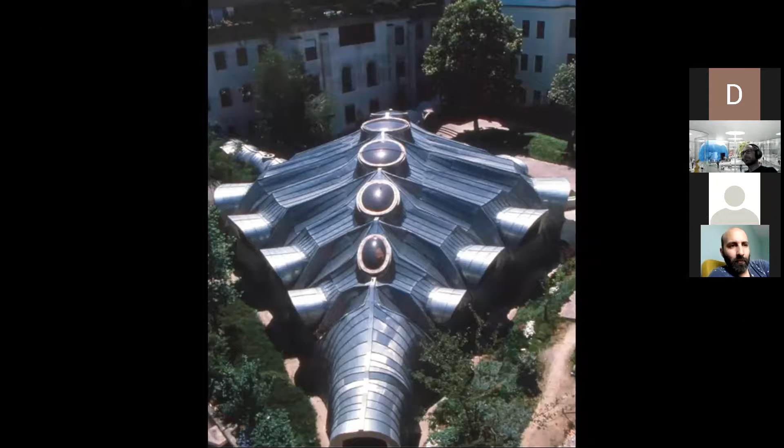During construction, it's very well crafted.

Now we will see a building where he did an intervention within a structure built by the Nazis. It was a big gathering place for the Nazis in Nuremberg, and Günther Domenig did an intervention on the ruins of that huge building that the Nazis built before the war, and it is symbolically an interesting intervention.

I found this phrasing: injection in a Nazi ruin, or confronting the architecture of evil. It was written in Domus. So even in its unfinished state, the Congress Hall, where his intervention took place, based on the Colosseum, is huge. The plan was to roof it and provide 50,000 indoor seats.

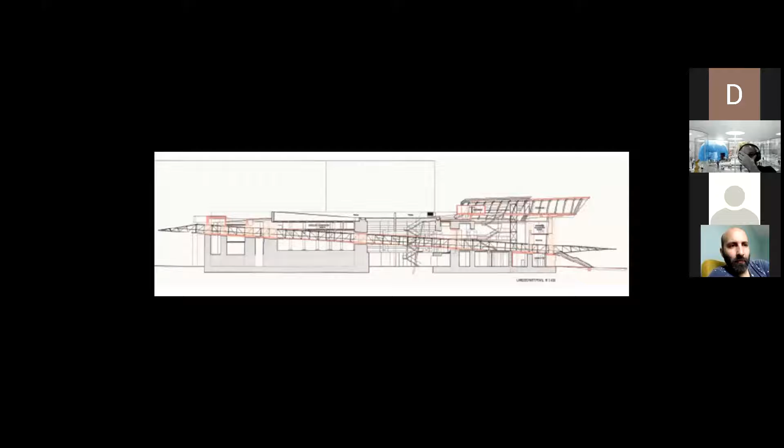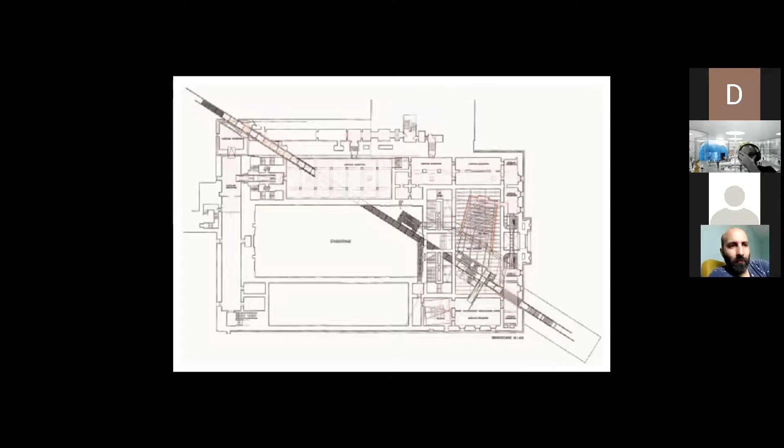So this was the building where you'll see the intervention of Günther Domenig. This is a section. You see he has this sloping circulation that crosses the whole building, and you see it in plan. It's truly almost the negation of the contemporary gesture, of something that was questionable because it was associated with the Nazis.

Günther Domenig was and is very good at expressing an architecture of conflict, or the conflict that architecture often cannot avoid. Domenig's response is like a guerrilla ambush, not a frontal assault, but it's still war. It is guerrilla war.

It was a big lie, a tragic lie, and millions of people died because of that horror. And the intervention by Domenig is legitimate, because it tries to externalize the truth that the Nazis tried to hide.

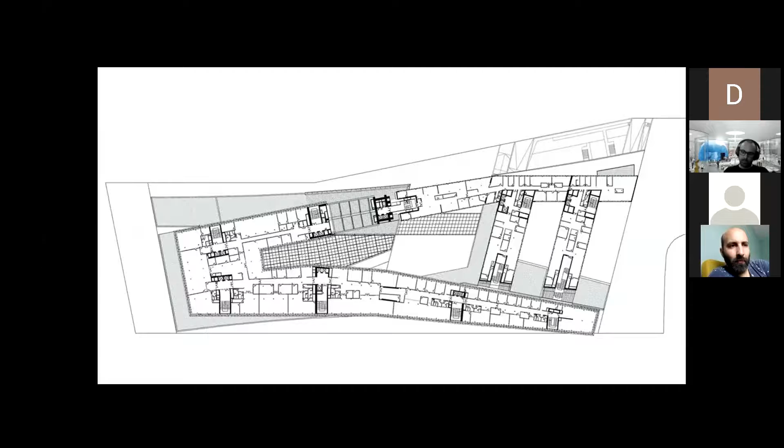Anyway, if you have 5 or 10 more minutes, maybe I could show you what I wanted to show before him, that wild artist, Hermann Nitsch, just to show you how split, how divided the Austrian spirit is. On one hand they could be very rational, ordered and civilized, and on the other hand they have some of the most explosive forms of non-conventionality, even bloody externalization of an inner truth that is not at all at peace with itself. If you want, I can show you in a few minutes what Hermann Nitsch does.